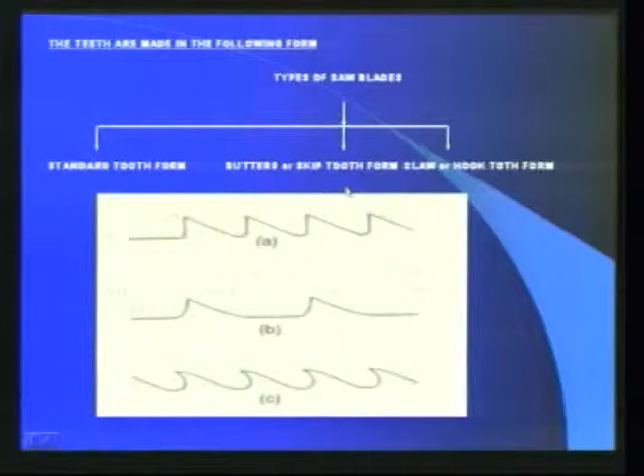Generally these three types of saw blades are used: one is standard tooth form, another is skip or buttress tooth form, and another is hook or claw tooth form.

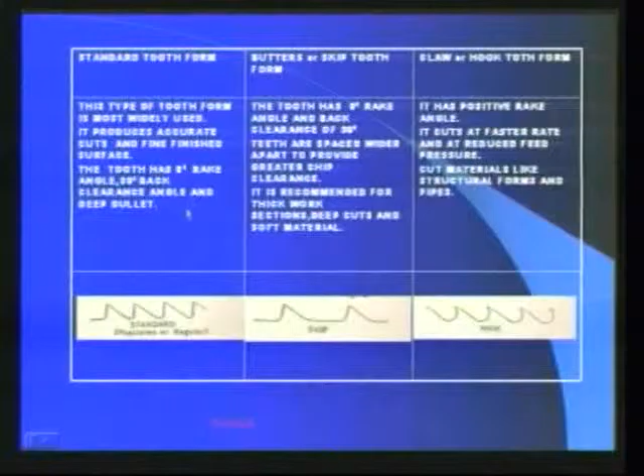Standard tooth form blade type is mostly used. It produces accurate cuts and fine finished surfaces. The tooth has 0 rake angle, 30 degrees back clearance angle, and deep gullet. This is the standard tooth form blade.

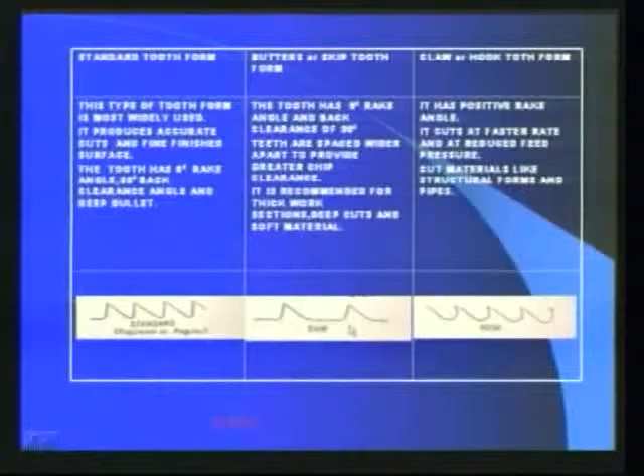This is the skip or buttress tooth form blade. The tooth has 0 degrees rake angle and back clearance of 30 degrees. Teeth are spaced wider apart to provide greater chip clearance. It is recommended for thick work sections, deep cuts, and soft material.

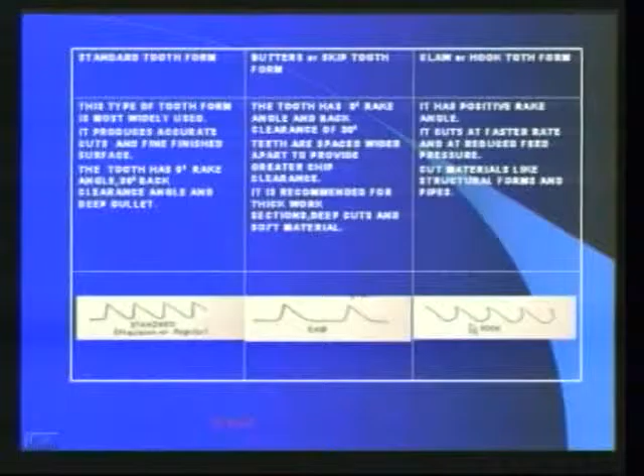This is the claw or hook tooth form blade. It has a positive rake angle. It cuts at a faster rate and at reduced feed pressure. It is used to cut materials like structural forms and pipes.

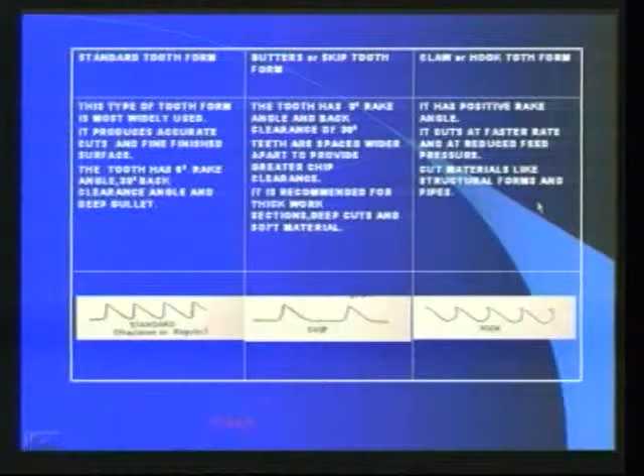Now we discuss the specifications of hacksaw blade. In order to purchase a blade, we must fully mention the specifications of the blade: one is length of the blade, next is width of the blade, next is thickness of the blade, and next is number of teeth per cm, which is called pitch of the blade.

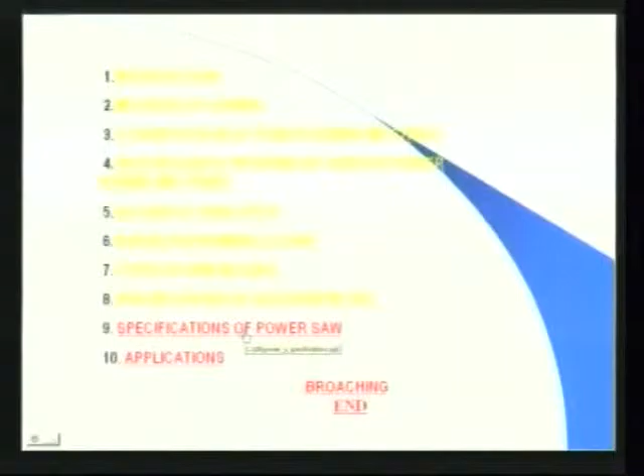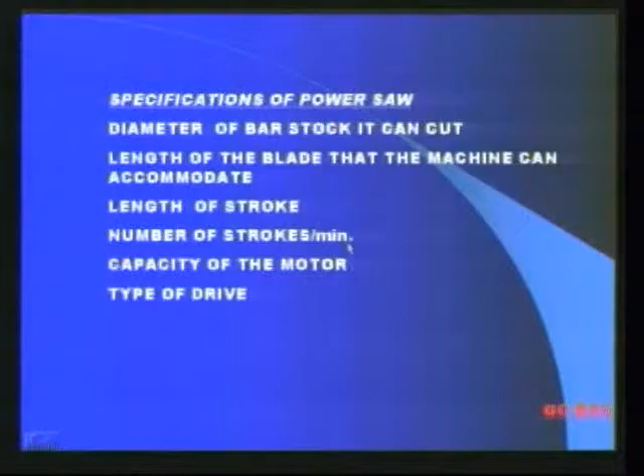Next we discuss the specifications of power saw. In order to purchase a machine, it needs to be specified with the following parameters: diameter of bar stock it can cut, length of the blade that the machine can accommodate, length of stroke, number of strokes per minute, capacity of the motor, and type of drive.

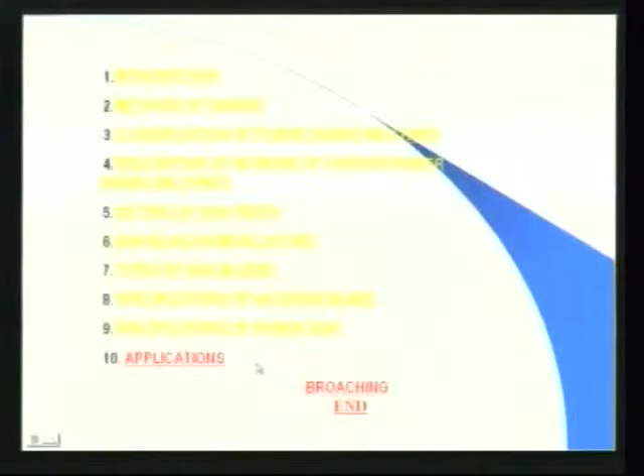Next we discuss various applications of hacksaw. Hacksaw blades are made with specified pitch. The selection of pitch depends on the hardness, the shape, and thickness of the material to be cut. In general, the blade with coarse pitch is adopted for cutting soft material, while the blade with fine pitch is used for harder materials.

When cutting thin sections, at least 2 teeth, preferably 3 teeth, should always be in contact with the workpiece. Therefore, blades with fine pitches are recommended for thinner sections which are not suitable with coarse blades.

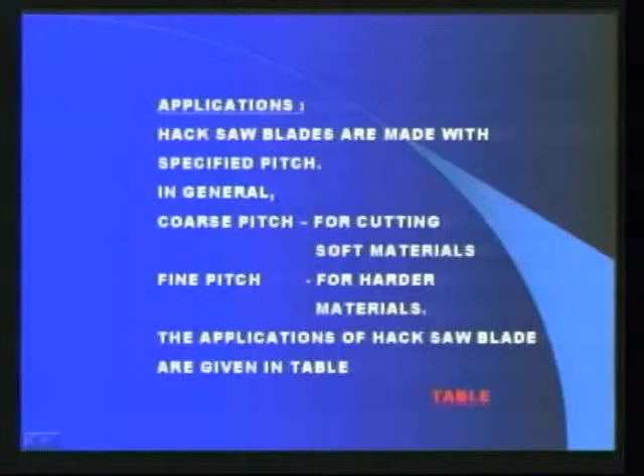The applications of hacksaw blades are given on the following table. If the blade has 12 teeth per cm, it is called fine pitch blade. It can be used to cut material up to 3 mm thickness.

This is used for the following applications: thin sheets and tubes, hard and soft materials of thin sections.

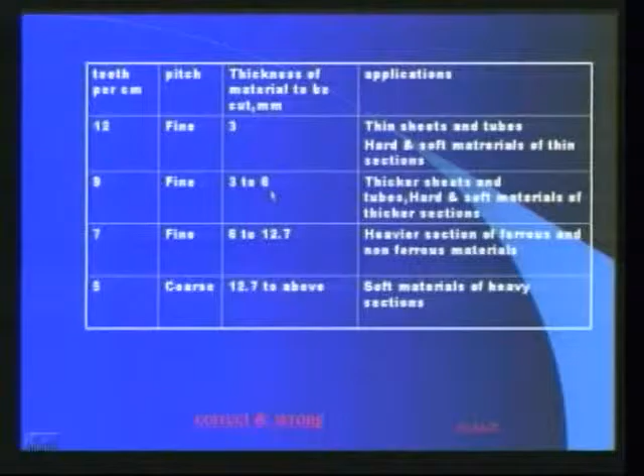A blade with 9 teeth per centimeter is also called a fine pitch blade. It is used to cut material from 3 to 6 mm. This is used for the application of cutting thicker sheets and tubes, hard and soft materials of thicker sections.

A blade with 7 teeth per cm is also called a fine pitch blade. It is used to cut material from 6 mm to 12.7 mm. It is used for the application of cutting heavier sections of ferrous and non-ferrous materials.

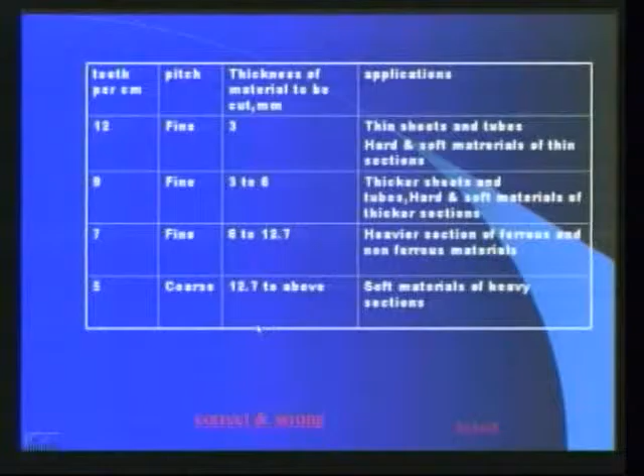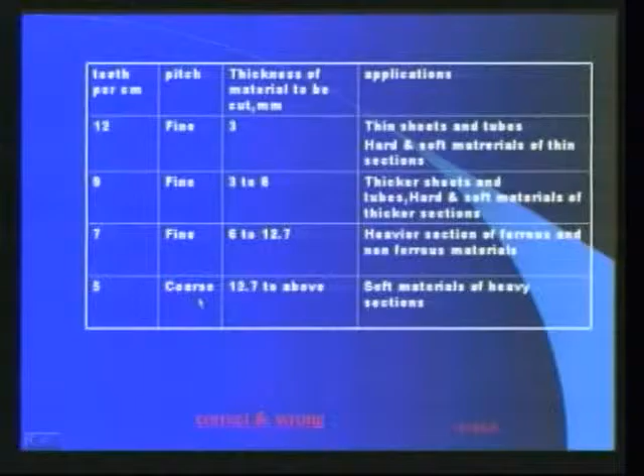A blade with 5 teeth per cm is a coarse pitch blade. It is used to cut material above 12.7 mm. It is used for soft materials of heavy sections.

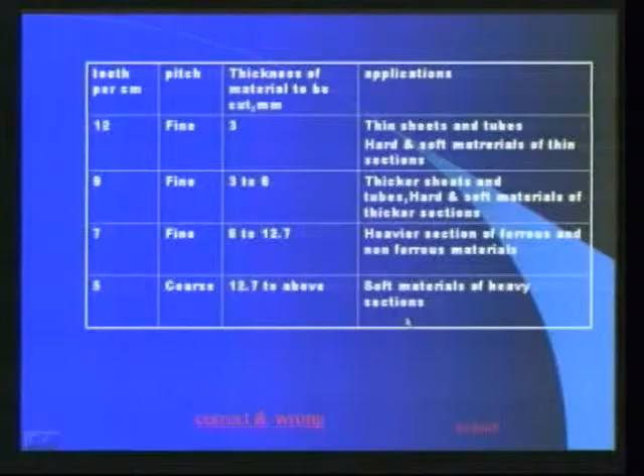We discussed already that when cutting thin sections, at least 2 teeth, preferably 3, should always be in contact with the workpiece. We now take some applications about the right way of using blades.

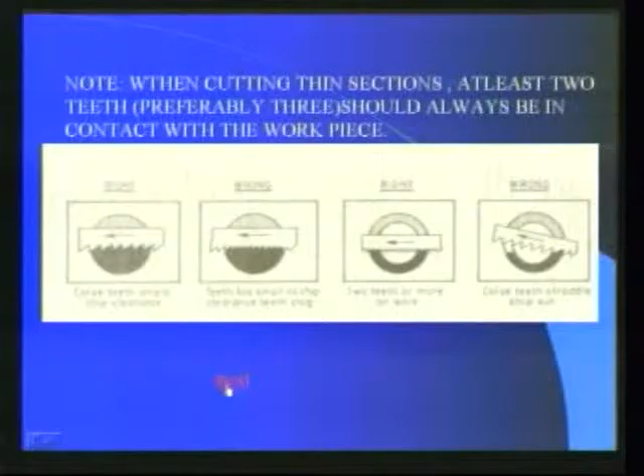Here, fine blade is used. It is the correct method. Here, if we use coarse blade, there is a chance to strip out.

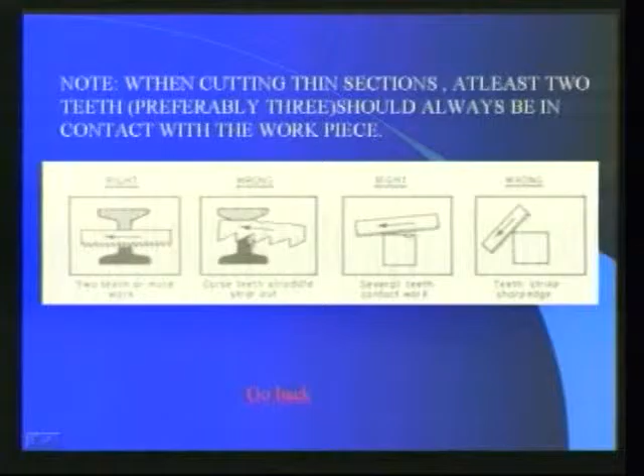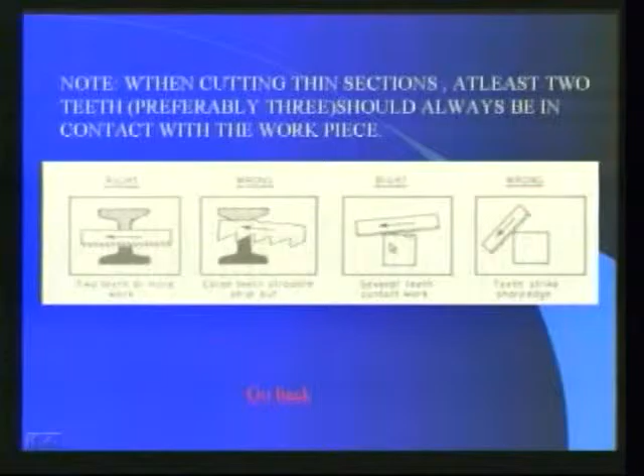In this application, this is the right method because more than two teeth are in contact with the work. This is the wrong method.

So far, we have discussed the following contents under the heading of sawing. First is various methods of sawing like hand sawing and power sawing, and next we classify various power sawing machines and discussed the working principle of various power sawing machines like horizontal sawing machine, vertical sawing machine, band sawing machine, etc. Next, we discussed saw setting and various types like straight set, raker set, wavy set.

and its nomenclature, and various types of saw blades like standard tooth form, buttress or skip tooth form, and claw or hook tooth form. Next, we discussed specifications of hacksaw blade and specifications of power sawing machine. Finally, we discussed various applications of sawing.

Hello students, in this session of the program, we are going to discuss the topic of broaching. Now, I am introducing it.

What is broaching? Broaching is a secondary machining operation like shaping, planing, milling, etc., but unlike these machining operations, in broaching the tool having a series of cutting teeth called broach is either pulled or pushed by the broaching machine past the surface of the workpiece.

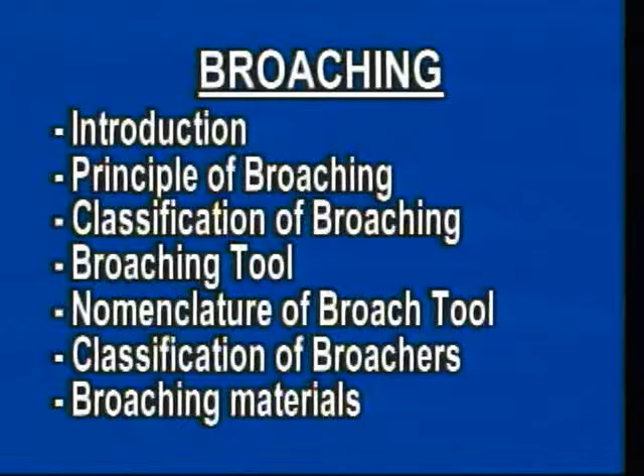Under the heading of broaching, I am going to discuss the following contents: introduction, principle of broaching, classification of broaching, broaching tool, nomenclature of broach tool, classification of broaches, broaching materials, types of broaching machines, working of various broaching machines, applications of broaching, advantages of broaching, disadvantages of broaching, and broaching machine specifications.

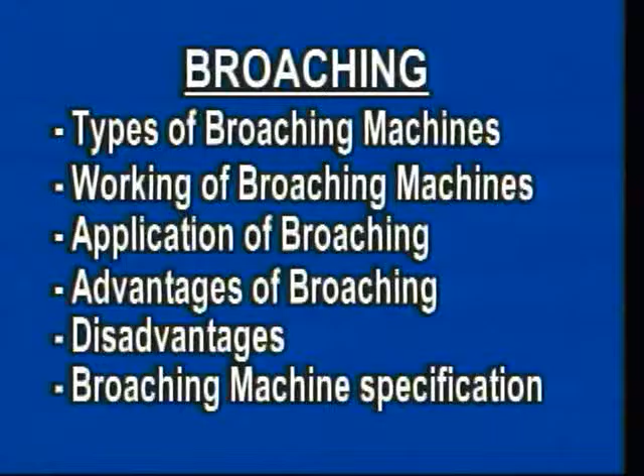Now, let us discuss what is broaching. Broaching is a method of removing metal by a tool that has successively higher cutting edges in a fixed path. It is shown schematically in the figure. Each tooth removes a predetermined amount of material.

Here the tool reciprocates similar to sawing operation. In sawing, the tool moves to and fro several times, whereas broaching operation is completed in a single pass.

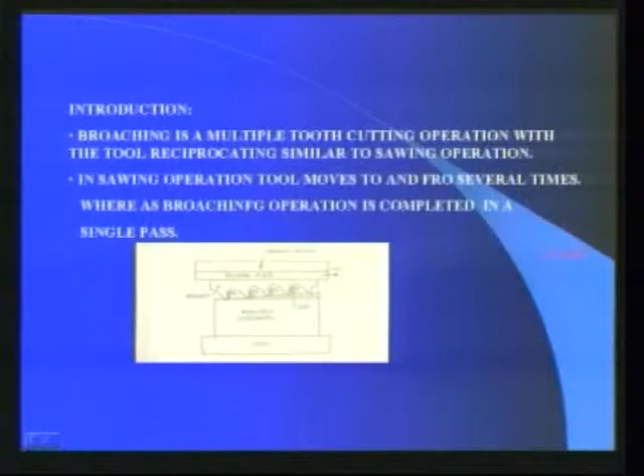Now we discuss the principle of broaching. In broaching, the broach is pushed or pulled over the external flat surface of a stationary workpiece. In internal broaching, the broach is pushed or pulled through the hole in the stationary workpiece. In certain machines, the broach is held stationary and the workpiece translates over the broach.

Each successive tooth is a little higher than the one preceding it. Therefore, each tooth removes a layer of work material. The first few teeth on the broach are low to permit the small end of the tool to be passed through the work. The machining operation completes in one pass of the broach.

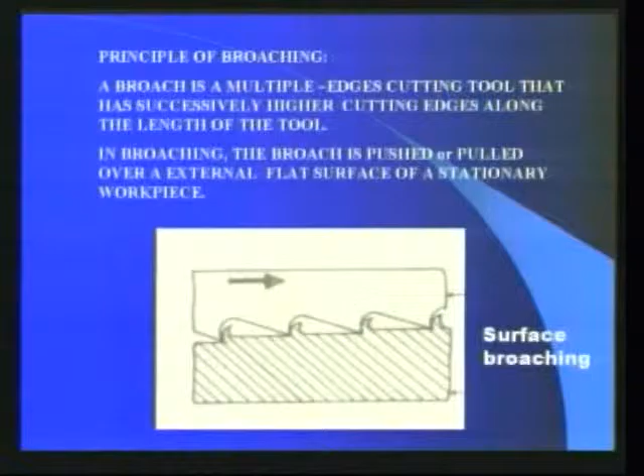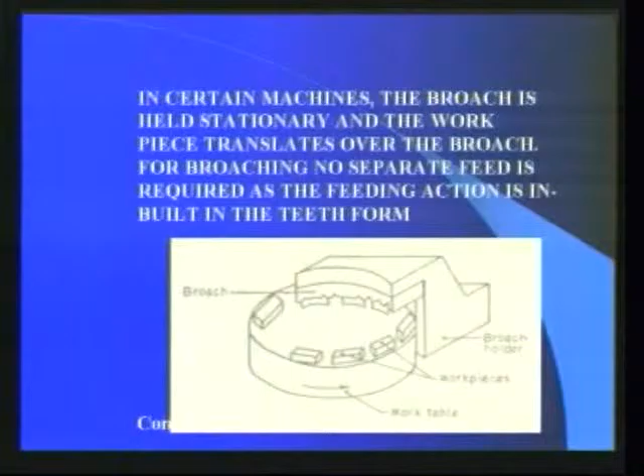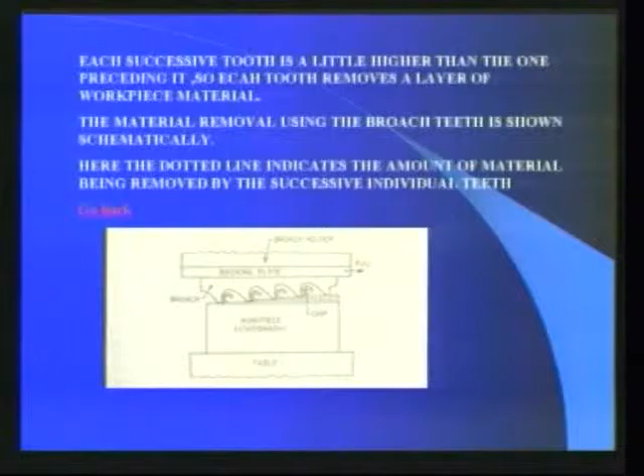The material removal using the broach teeth is shown schematically. Here the dotted line indicates the amount of material being removed by the successive individual teeth. Now we discuss the classification of broaching.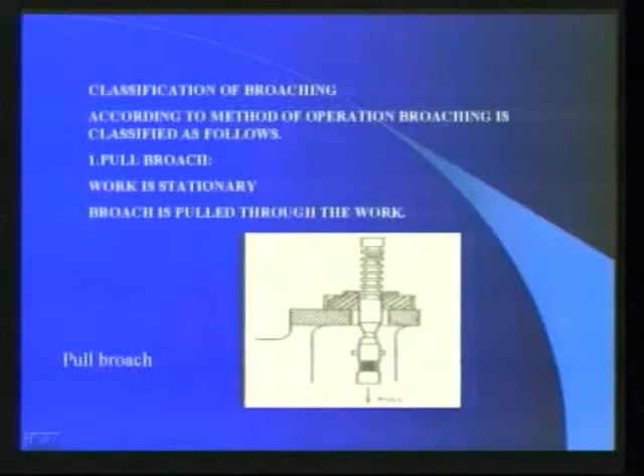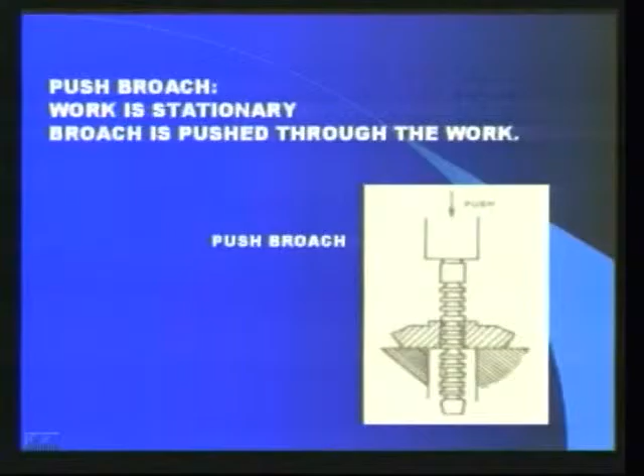Next is push broaching. Here the work is stationary and the broach is pushed through the work. Next is surface broaching. The broach moves across the work, or vice versa.

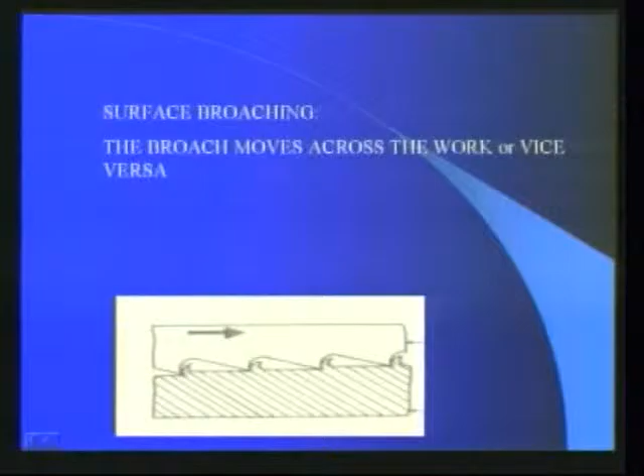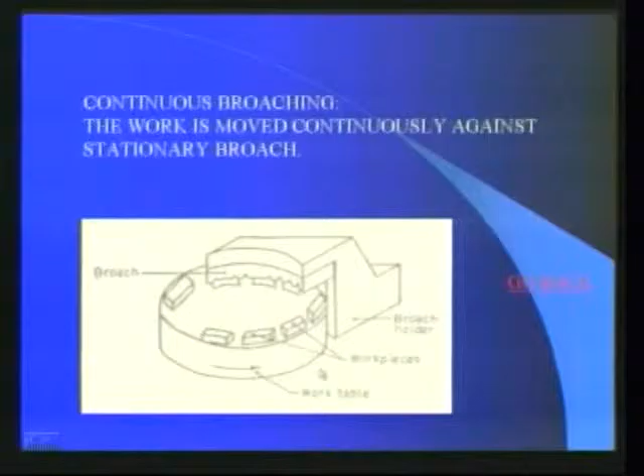Next is continuous broaching. The work is moved continuously against a stationary broach; the broach is stationary and the table revolves with the workpieces. Now let us discuss the broaching tool.

A broach is a multiple-edge cutting tool that has successively higher cutting edges along the length of the tool. A broach generally has three types of teeth: roughing teeth, semi-finishing teeth, and finishing teeth, as shown in the diagram.

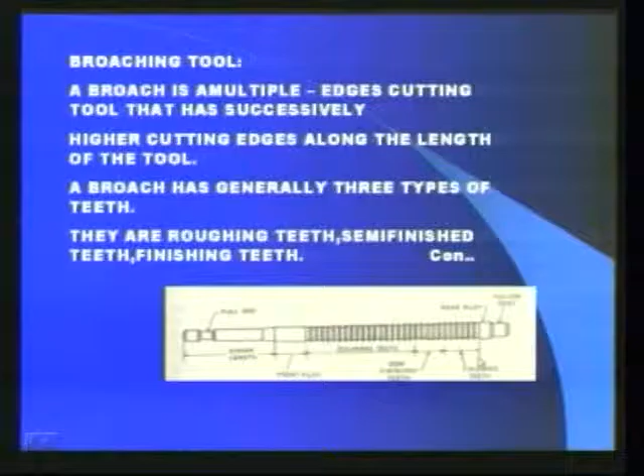The first roughing tooth is the smallest tooth on the broach. These are designed to cut the heaviest metal. The next portion has semi-finishing teeth, which progressively increase in size up to and including the first finishing tooth.

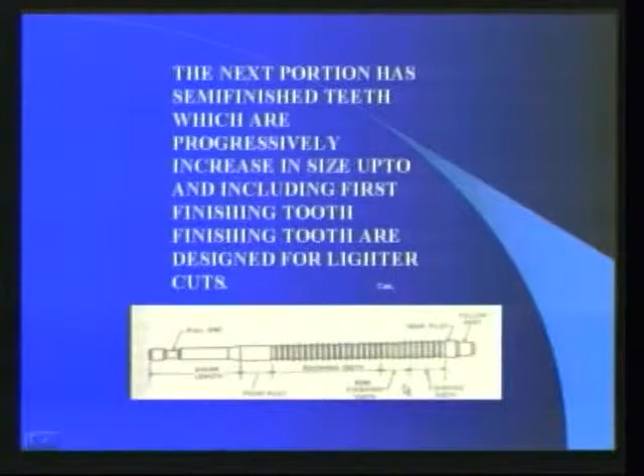Finishing teeth are designed for lighter cuts. The last few finishing teeth are made of the same size to attain a high degree of accuracy and surface finish. The pull end is designed to permit engagement of the broach with the broaching machine by using a puller head.

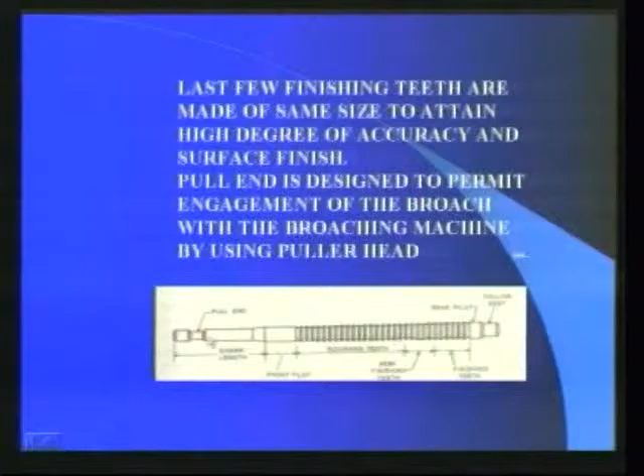This is the pull end. Front pilot keeps the broach in the center of the hole before cutting. Rear pilot and follower rest support the broach after the last tooth leaves the hole. A push broach is made short in length to prevent bending under compressive load.

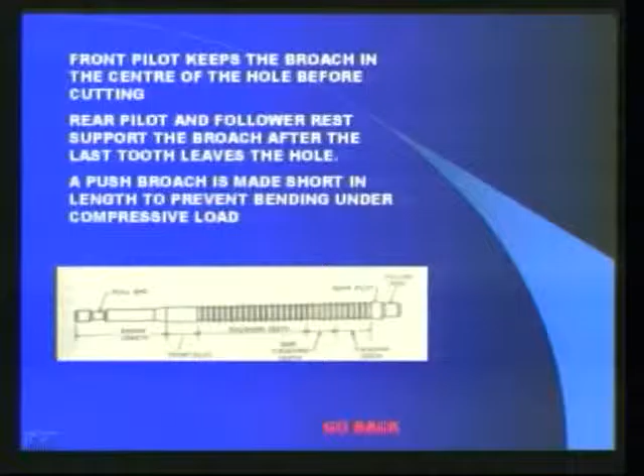Now let us discuss the nomenclature of broach tooth, as shown in the figure. The height of teeth gradually increases from shank to finishing teeth. This increment is called cut per tooth.

It varies from 0.01 to 0.2 mm. Its variation depends on the work material and size of the hole.

The pitch is defined as the linear distance between the cutting edge of a tooth and the corresponding edge of the next tooth. The pitch selected should be such that at least 2 or 3 teeth must remain in contact with the job.

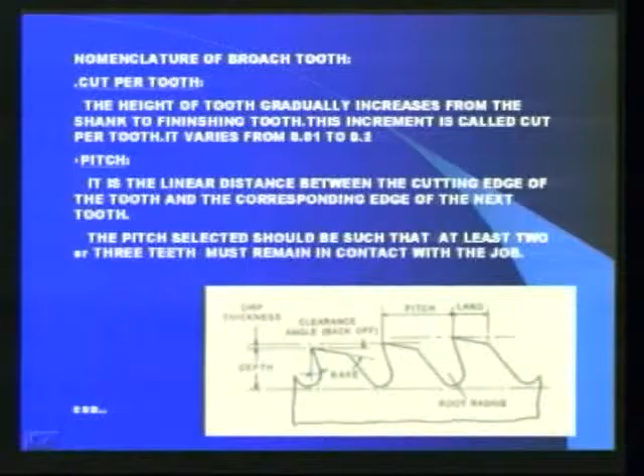The pitch is calculated using the empirical formula: P equals 1.75 times the square root of L, where L is the length of the job to be machined in mm. An average pitch for small broach is 3.2 mm to 6.4 mm, and for long broach is 12.7 mm to 25 mm.

Land is the top portion of the tool, and is ground to provide a slight clearance.

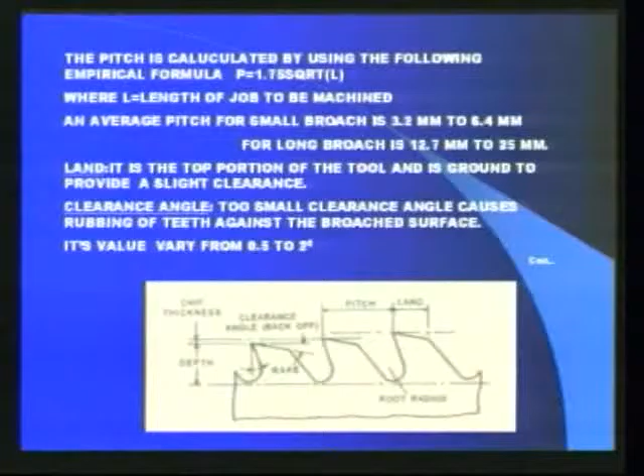This is the clearance angle. Too small a clearance angle causes rubbing of teeth against the broached surface. Its value varies from 0.5 to 2 degrees.

Rake angle corresponds to the rake angle of a lathe tool. It depends on the work material, and its value increases as the ductility increases. Mild steel is a ductile material, for which it is 15 to 20 degrees. For alloy steels it is 8 to 10 degrees, for cast iron it is 4 to 8 degrees, and for aluminum the rake angle should be as high as possible.

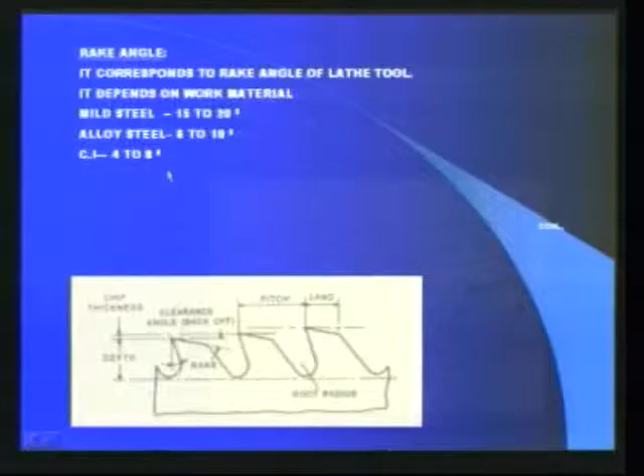Gullet provides space for the chips to curl and escape. This is the gullet. If the space is not sufficient, the chips will rub against the hole surface and spoil it.

This is correct chip formation, and this is incorrect chip formation, where the design of the gullet is not correct.

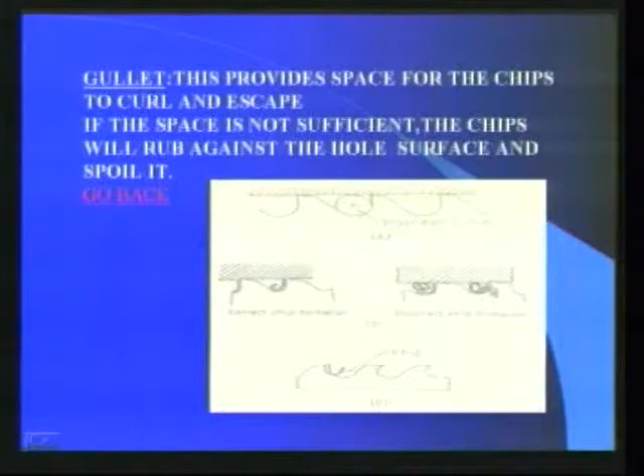Now let us classify broaches. Broaches are classified according to type of operation, method of operation, and type of construction.

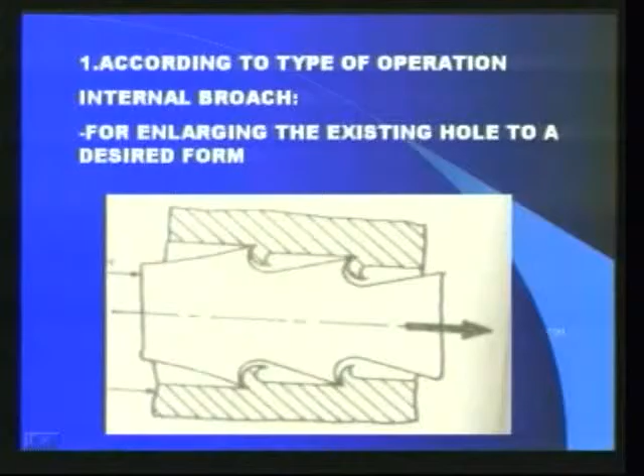According to type of operation, broaches are classified as internal broach and external broach. Internal broaches are used for enlarging the existing hole to a desired form. External broaches are used for machining external surfaces to the desired form.

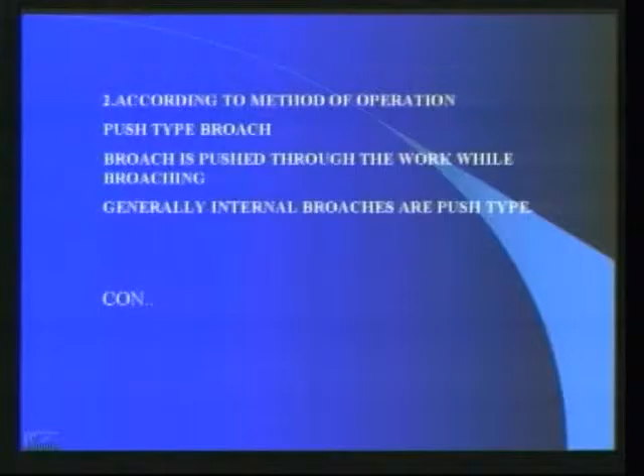According to method of operation, they are classified as push type broach and pull type broach. Push type broach is pushed through the work while broaching; generally internal broaches are push type. Pull type broach is pulled through the work while broaching; generally external broaches are pull type.

Now let us shift our discussion to the types of broaches classified by type of construction. They are classified as solid broaches, built-up broaches, and inserted tooth broaches. A solid broach is made in a single piece, but a built-up broach is made up of several sections.

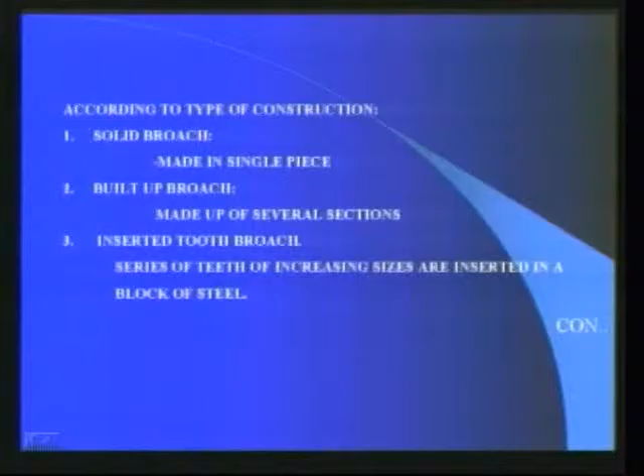Inserted tooth broaches have a series of teeth of increasing size inserted in a block of steel. They are made like that.

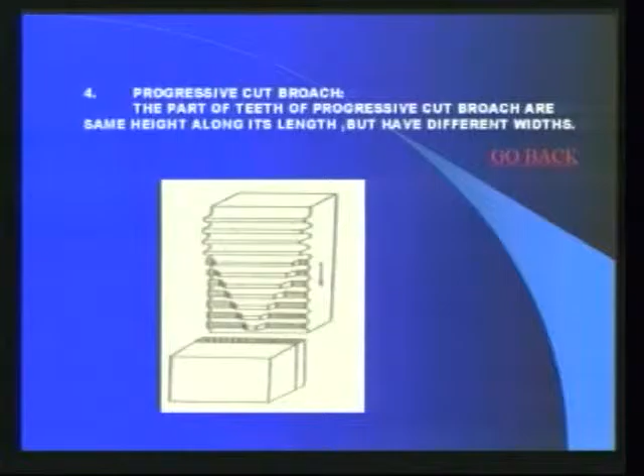Another one is the progressive cut broach. The teeth of a progressive cut broach are the same height along its length, but have different width, as shown in the figure.

According to the operation, they are classified as hole broach, surface broach, keyway broach, and spline broach. This is the keyway broach, this is the spline broach, this is the hole broach, and this is the surface broach.

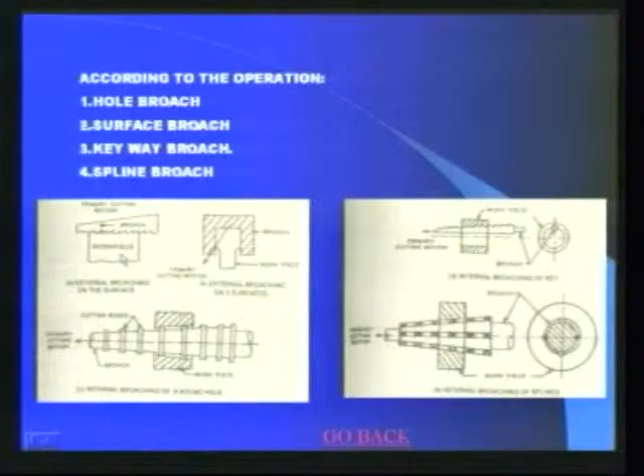Now we continue our discussion on broaching materials. High speed steel, having the composition of 0.7% carbon, 18% tungsten, 4% chromium and 1% vanadium, is the most suitable material for broaches. It is hardened before the teeth are ground to the required finish.

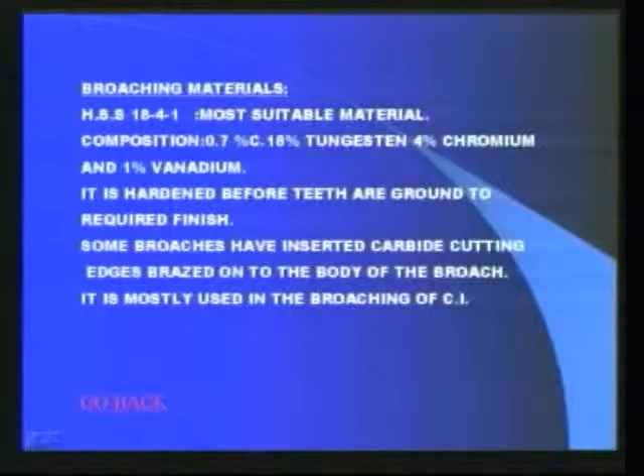Some broaches have inserted carbide cutting edges brazed onto the body of the broach. It is mostly used in the broaching of cast iron. Now we discuss various types of broaching machines.

Broaching machines are classified as follows: horizontal machines, vertical machines, and special design machines. Horizontal machines may be pull or push type. Vertical machines may be pull up, pull down, or push down.

Horizontal machines are further classified according to type of drive and according to type of operation. According to type of drive, they may be classified as mechanically operated or hydraulically operated.

According to type of operation, horizontal machines may be classified as surface broaching machines or internal broaching machines. If we come to vertical machines, according to type of operation, they may be classified as surface broaching machines or internal broaching machines.

Special design machines are classified as follows: rotary table continuous machines, and horizontal continuous machines.

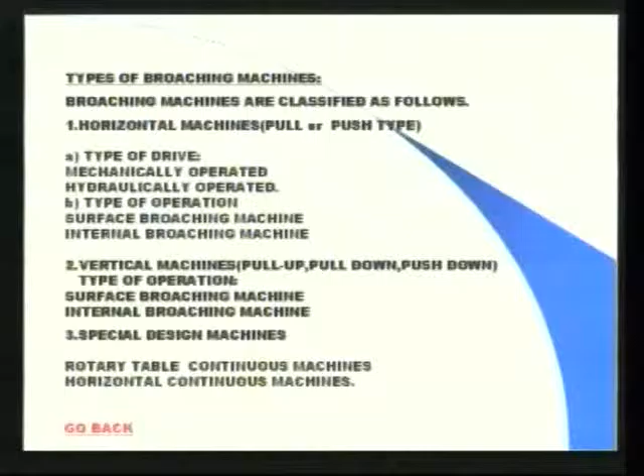Now we discuss about horizontal broaching machine. The horizontal broaching machine is used for surface broaching or internal broaching.

Generally, most commonly these machines are used for surface broaching. In surface broaching, the tool is pulled over the surface, and the work is held in the fixture.

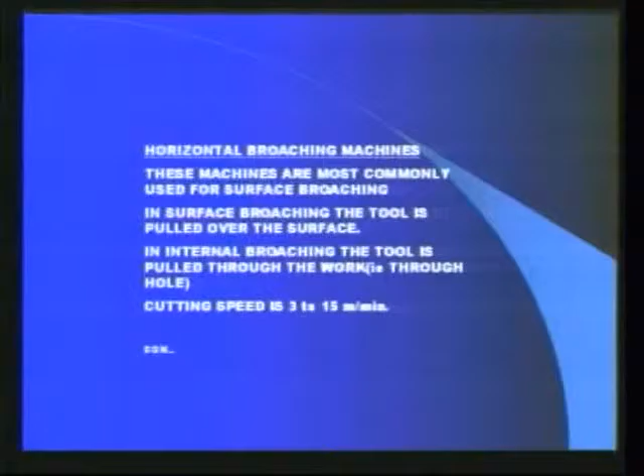For internal broaching, the broach is pulled through the work, that is, through the hole. These machines are mostly pull type and can be operated at a cutting speed of 3 to 15 meters per minute.

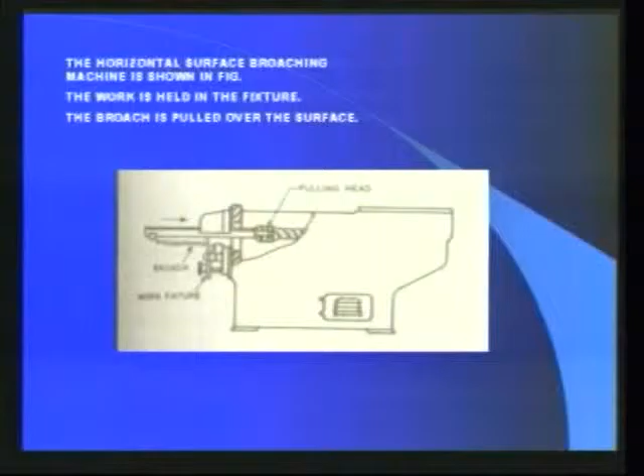The horizontal surface broaching machine is shown in the figure. The broach is pulled over the top surface of the workpiece held in a fixture.

Now we discuss about vertical broaching machine. It is also used for surface broaching or internal broaching, and it is most commonly used for surface broaching.

It has a vertical slide to which the broach is attached. The workpiece is held in a fixture on the table. The broach tool is pulled vertically down against the stationary workpiece.

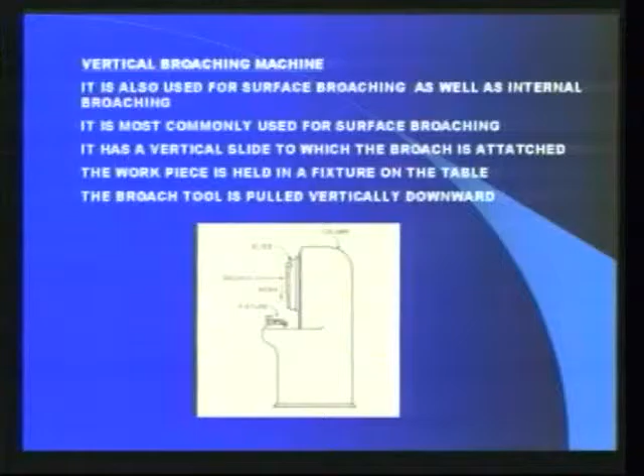Vertical broaching machines may be of the push down, pull down, or pull up types, but the majority of machines are pull type.

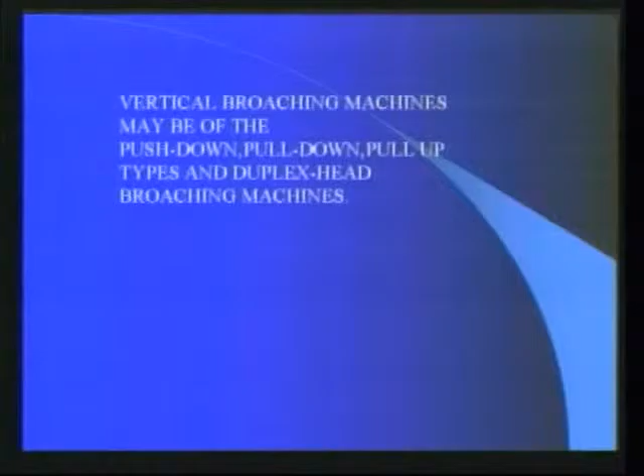Now let us discuss about push down broaching machine. The principle of the push down broaching machine is shown in the figure.

The holes previously drilled, punched, or cored may be finished accurately. It requires a short broach of sufficient cross section to prevent bending due to the force imposed during the operation.

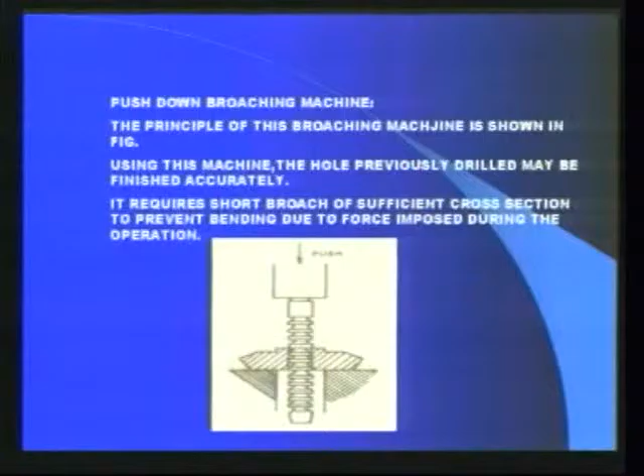Now we discuss pull down broaching. Pull down machines are used for internal broaching.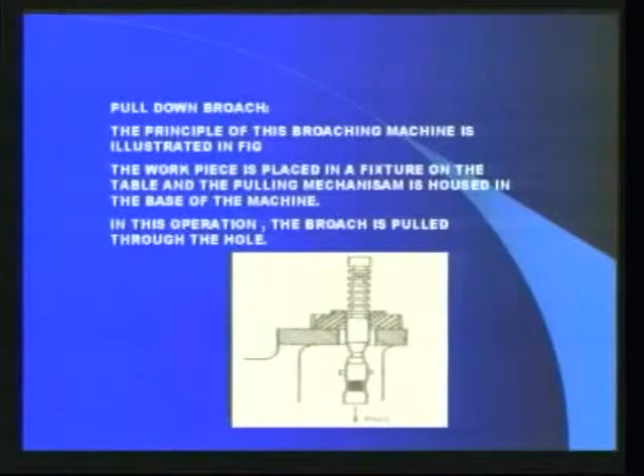In operation, the broach is pulled through a hole. After completing the operation, the broach is moved up to the initial position.

In this machine, the positioning of the part is easier and large parts are handled easily.

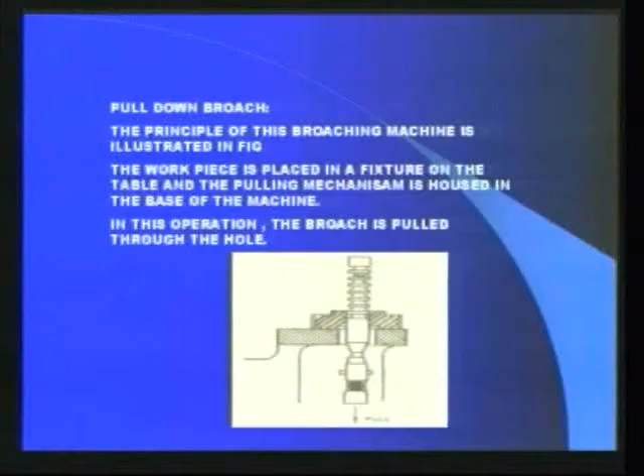Next, we discuss about pull-up broaching. The pull-up broaching machines are used for internal broaching of small parts. The principle of operation is similar to pull-down machines, but it is reversed.

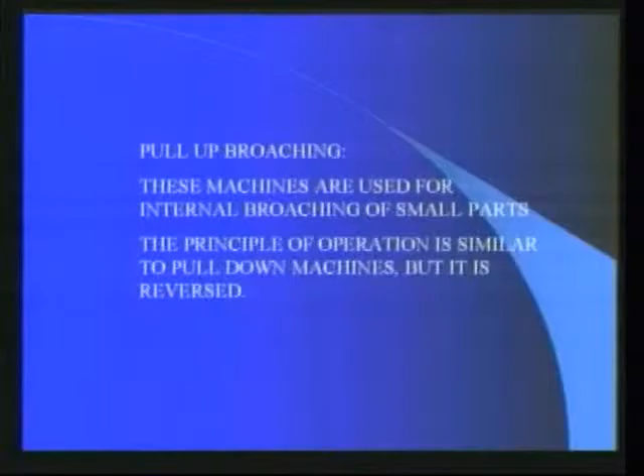Next, we discuss about duplex head broaching machine. This broaching machine has two slides, and those two slides are called duplex heads.

Hence it is called duplex head broaching machine. These are mostly push type machines and are commonly employed for surface broaching. The rate of production with these machines is high.

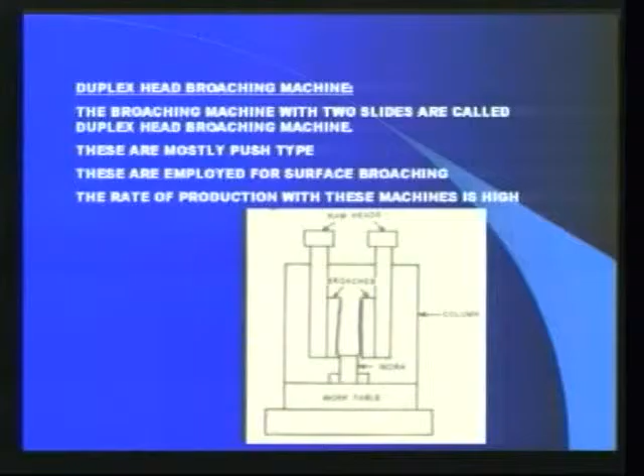Now we discuss about continuous broaching machines, or special broaching machines. In continuous broaching machines, the broach is held stationary while the workpieces are continuously passed under them.

In these machines, the workpieces are loaded and unloaded without stopping the machine. This facilitates continuous operation, and these machines are used for mass production of small components.

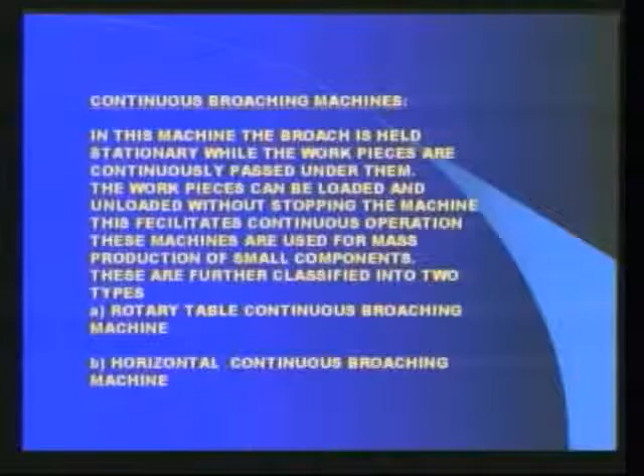Continuous broaching machines are classified as follows: rotary table continuous broaching machines, and horizontal continuous broaching machines. Now we discuss about those machines one by one.

First one is the rotary table continuous broaching machine. In this machine, the workpieces are fixed on a revolving table under a stationary broach. This type of machine is used for facing of small parts.

This is the broach, the stationary broach. Workpieces are fixed on the revolving table. This is the revolving table.

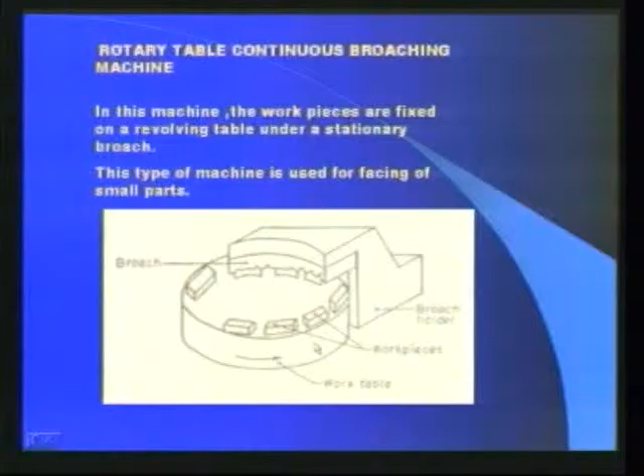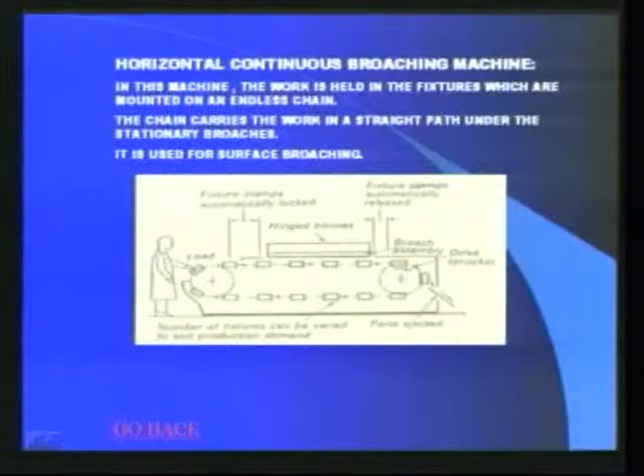Next one is the horizontal continuous broaching machine. In this machine, the work is held in fixtures which are mounted on an endless chain.

The chain carries the work in a straight path under the stationary broaches, as shown in the figure. It is used for surface broaching.